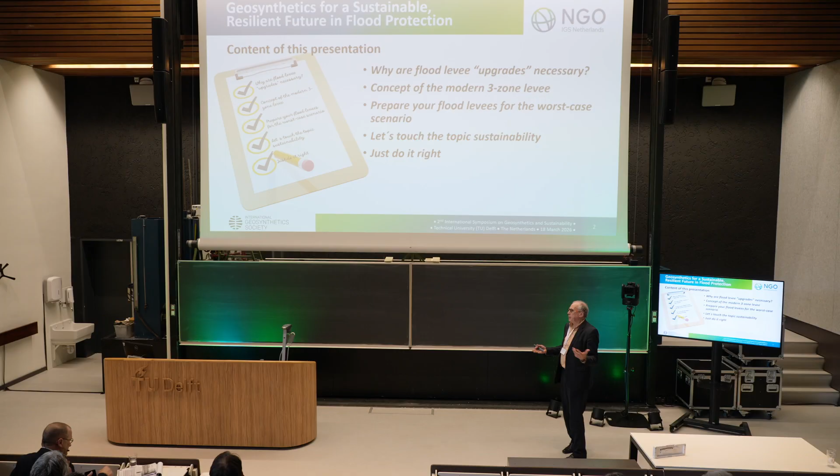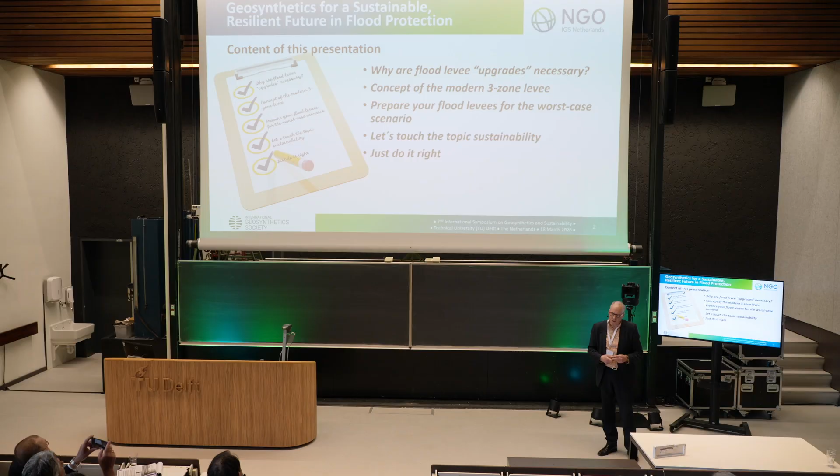So this is a bit of the outline of what I'm going to be talking about today. Why do we need levee upgrades? We all know computers are upgraded, cars are upgraded, everything is upgraded nowadays, even our environmental regulations, so we have to follow that with geosynthetics or with the design as well. Then I'm going to explain a bit about the three-zone concept, which is an improvement for levees.

And then I want to go a step beyond what I said, for young engineers and also the ones who are still designing, to think about what else did I miss. Because water is smart. Water finds the weakness of everything, and we're dealing with water. And then, of course, sustainability. A bit of what you hear from the others is going to be part of mine too, but very short, because I think that's covered pretty good. And then just do it right at the end.

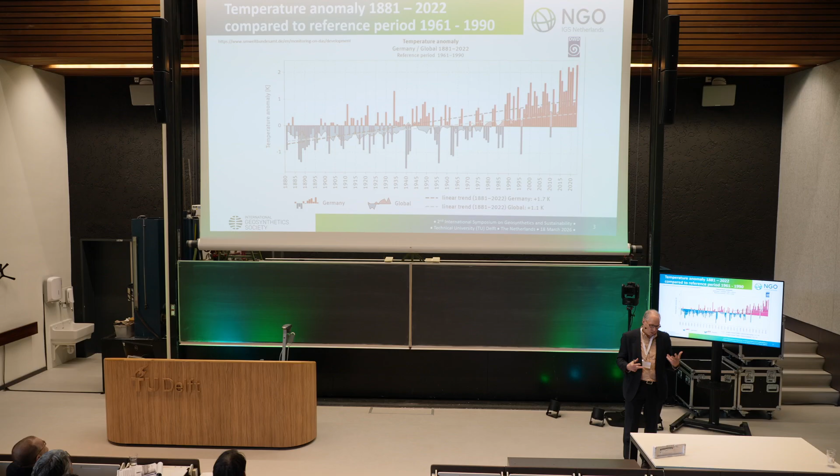Let's start with our climate crisis. We heard a number right now from 1.5 degrees increase and insects dying. In my graphic, you see over here, this is now for Germany, if you look at the temperature period and these right columns over here, you see that the temperature is increasing every year. We know that. That's nothing new. I'm not here to explain why and how that's happening.

And over the last 50 or 100 years, we have around about 1 degree increase. You can take the higher numbers, it will be 1.5 degrees, but that doesn't matter. Do you know the impact of 1 degree centigrade increase, what that really means? I was shocked as I heard that in a presentation several years ago. A 1 degree increase in temperature means for us here in Europe 10% more rain.

Floods, water, rain, that fits together. And if we now go into 1.5 degrees or 2 degrees, it's going to be more water. The problem is we don't know where this water is coming down, it's evaporation, and we hear it every year. We had in Germany 3 years in a row huge dry summers. Okay, great, warm, nice, sun. But then suddenly we had 2 years in a row where the water just flushed down the whole summer, and we had a lot of floods.

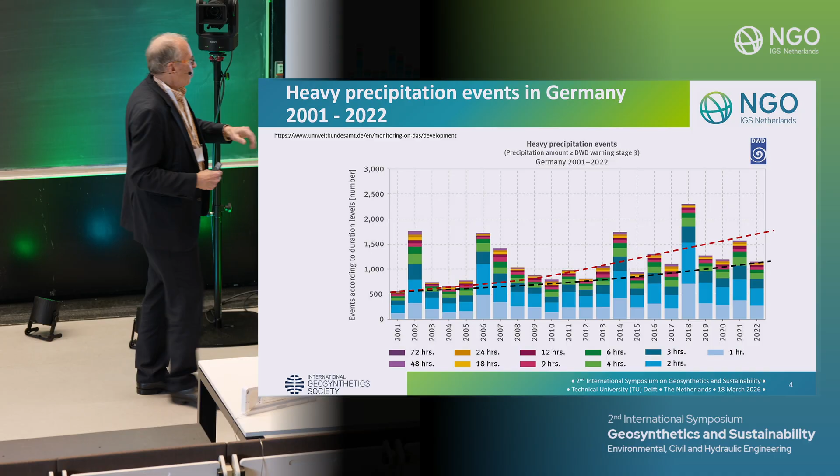Everything we designed 100 years ago didn't include these factors, we didn't know about them. So please, young people, don't blame us, we did everything wrong, we didn't have the data for that. But now we have much more data, and now it's the chance to improve these things.

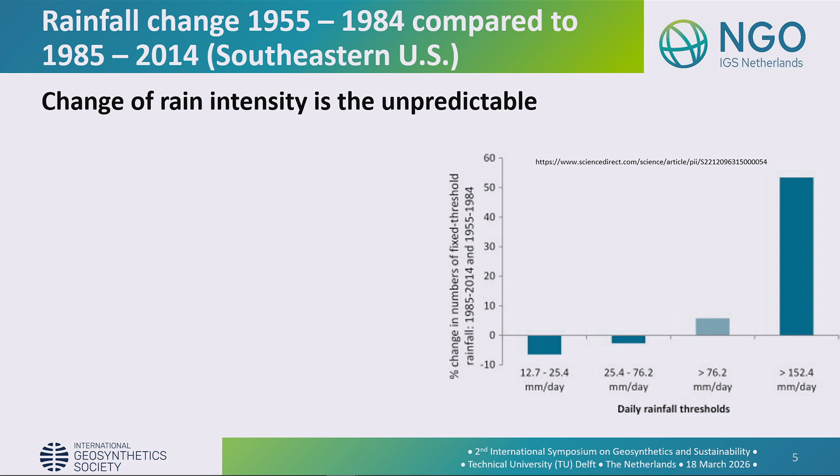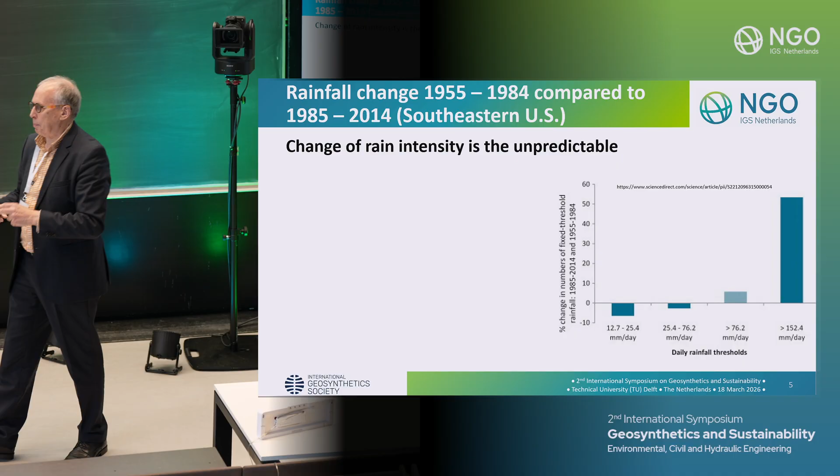And now my question: climate crisis meets an inequality or a structural imbalance, not good design or levees not strong enough. What's the word for that? You were right, it shouldn't happen, but if it happens, what is that? It's easy, it's like the egg of Columbus, if you have the answer it's easy. It's a disaster or it's a tragedy. People die, we lose money, a lot of things happen. That's the consequence, we just have to face that.

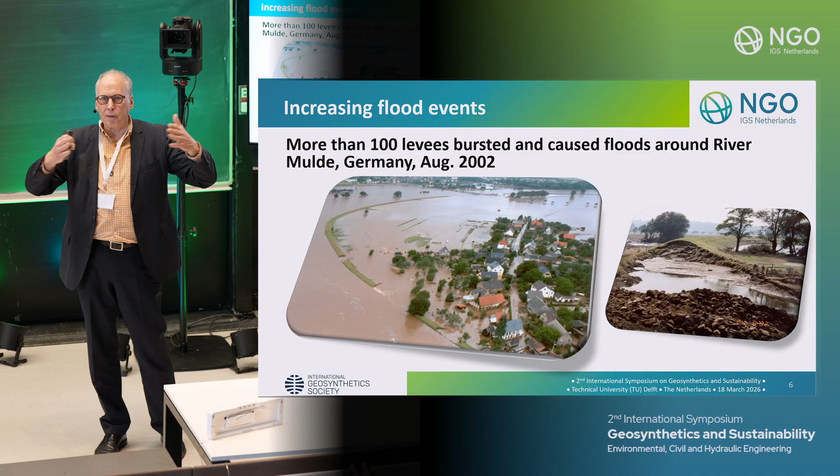And now, as engineers, we have to go a step forward. These are from 2002, look at the levees. Levees were just flooded. They were not bad, they were not wrong, they were well designed, but they couldn't withhold the water for that period of time, because the duration of water coming down and flooding was longer than those levees were designed for. So we have to reconstruct these things.

Many of those levees worldwide, not only in Germany, I think many parts of the world are old. How were they built? With sand, because that was good enough. We knew there'd be a flood, we'd have 2-3 days of water. Water can go through the dam, we don't have barriers in there. They just have to maintain the water and the pressure, and we're fine.

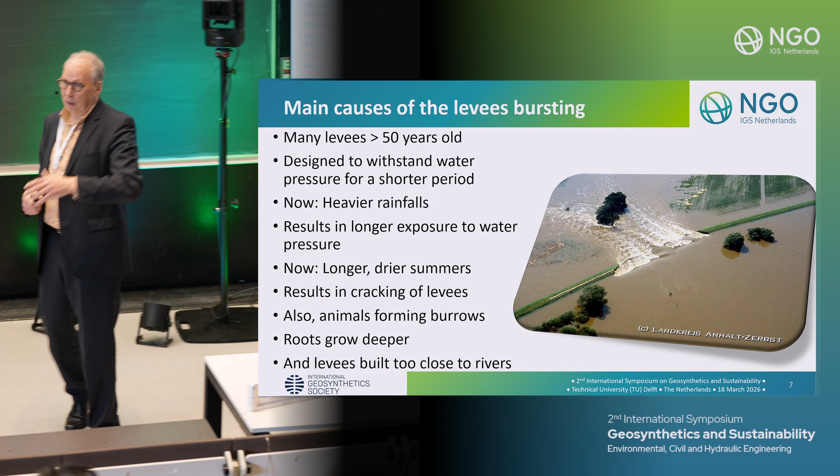So that was it. Now we have heavier rainfalls, we have more water coming down. And worst case scenario is we have rainfall and snowmelt at the same time. We don't know when those things are going to happen. And if we have that - Austria had that, and Czechoslovakia and those countries, they had snowmelt and then suddenly a lot of rain. That's a disaster for everybody.

We also have longer and drier summers. What does that mean? That means the levees crack, roots grow deeper because they are looking for water. Animals bury themselves into those levees, they destroy them, make channels in there, and water is smart - it will find the way and go through there. Once the water goes through a dam, that's where we have the issue.

And the last one, that's our problem. That's economics - the last one is our own problem. We're causing our own problem. We built too close to the levees. And I'll show you some examples.

This example, US, I'm sorry about that, but they followed the Ludy reduction of floodplain areas. They said, oh, we have all this area over here, and we could sell it. Nothing happened the last 5 years. Let's make cheap land out of it. So you remove the levee closer to the river. You sell this, you build housing, and suddenly we have these rainfalls and snowmelt and whatsoever, and we have the floods, and everybody's surprised.

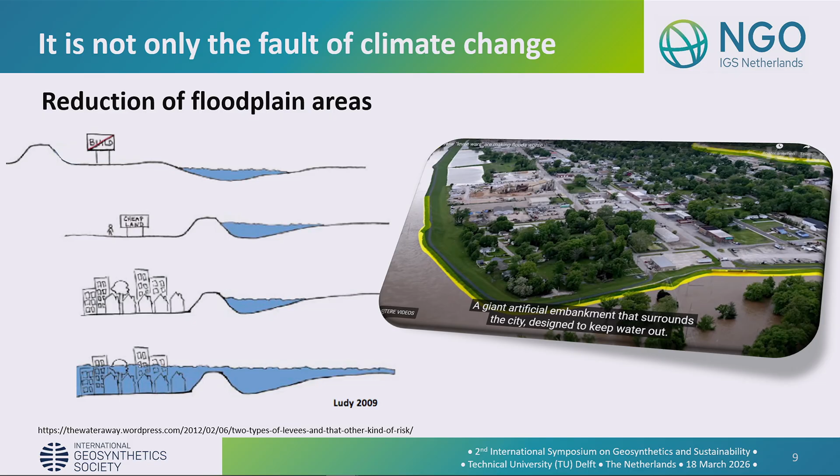This is an example you see over here on the picture - the original levee was back there. And now they built all the way to the front side, industrial area, fine, is great. Nothing happened to them, by the way. They were lucky because they lived upstream. But all this water coming down the river had to go somewhere. Originally, it was able to go into this floodplain area, but it's blocked. So the water just moves on down the river. And now the communities who lived down there, they got flooded.

I can imagine in the US a lot of lawyers making a lot of money off of that, suing those people because it's their fault at their area, but that's another story. So don't do those things. The water has to go somewhere and has to go into the floodplains.

So here we have the damage mechanisms of a levee. The first one, okay, we can't do anything against that one other than to build higher - the overtopping. We'll come to all of those topics and how to build with geosynthetics and prevent those things from happening. Erosion on the upstream side, on the water side, critical because we can't see it. Because if the water's there, you don't see under the water what's happening there. If something like that happens, then your levee could burst and break.

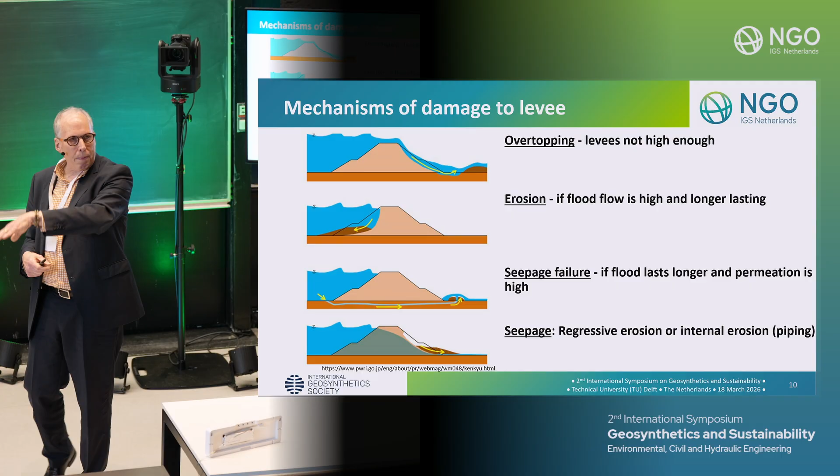Seepage under the levee is also critical. You can see that because water would be on the downstream side, so you see that water if it's not raining. If it's rained the whole time in that area, you won't see it, but if it's dry and you're just having water, you can see those puddles of water. And then, of course, the seepage, which causes erosion on the backside, on the downstream side, which is really the big issue. So these are the things we have to consider in our design and do something against it.

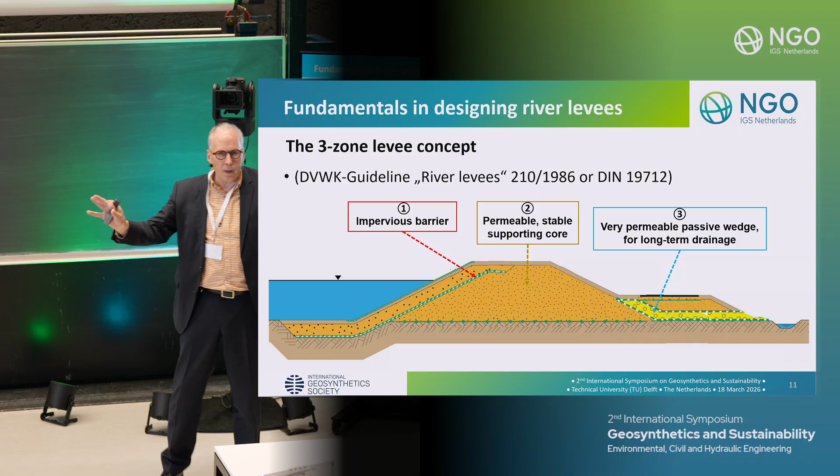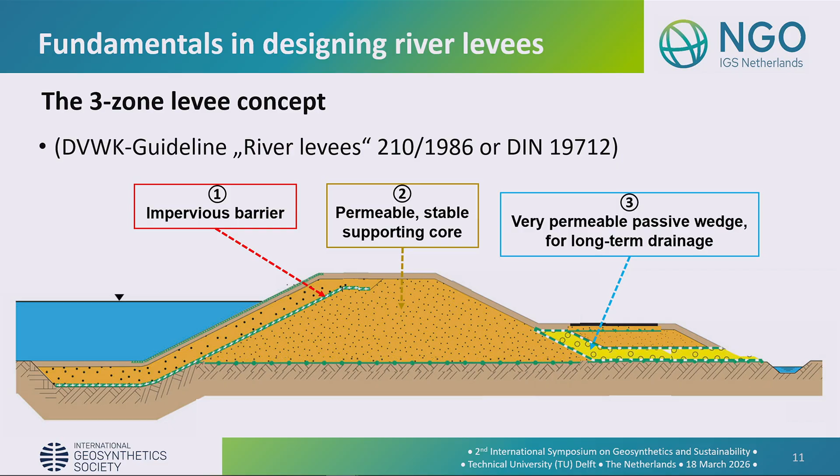Now, the first and the easiest one, which every handbook will tell you, if you build a new dam, put a barrier on the front. Good - if you do that, I'm already happy, or every designer will be happy. You have a barrier on the front side, you're preventing the water flowing through your levee. You can go down on the front side, you can build horizontal there or vertical down here to prevent the underflow under the dam. Then you're already pretty good. But that would be, I would say, the easiest design - that's not the high-level first-class design, which I'm going to.

The second thing we're going to be looking at is the supporting core, and the third one would be our release, sometimes called a permeable passive wedge. It's also called a defense road, so roads and trucks can drive during the damage or during the flood season in that area.

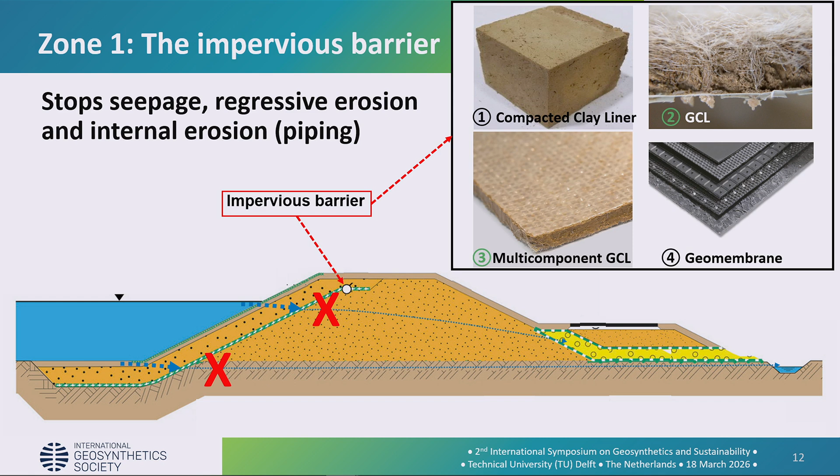So first of all, we have various solutions. Some of them are clay solutions, some can be geosynthetic solutions, and it can also be a geomembrane. Honestly speaking, geomembrane and compacted clay liners are those two solutions I would not 100% recommend, even though a geomembrane is probably the most impermeable material we have. But you have to think in terms of construction as well. You have to weld them together on site.

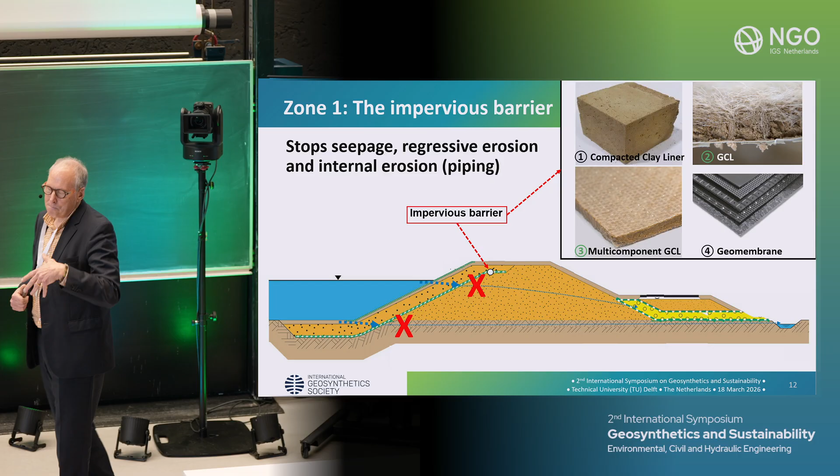They have to be protected against damage. You need geosynthetics or sand for protection. Sometimes you have structures there where you have to weld against, and you can't weld concrete and a geomembrane together, so you have a lot of costs involved. So geomembranes are not the most used ones. The most used ones are basically geosynthetic clay liners, and we'll talk about these different systems shortly.

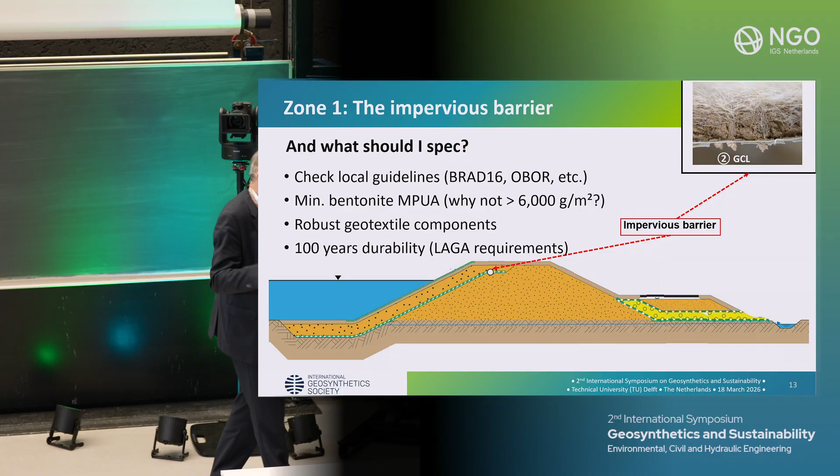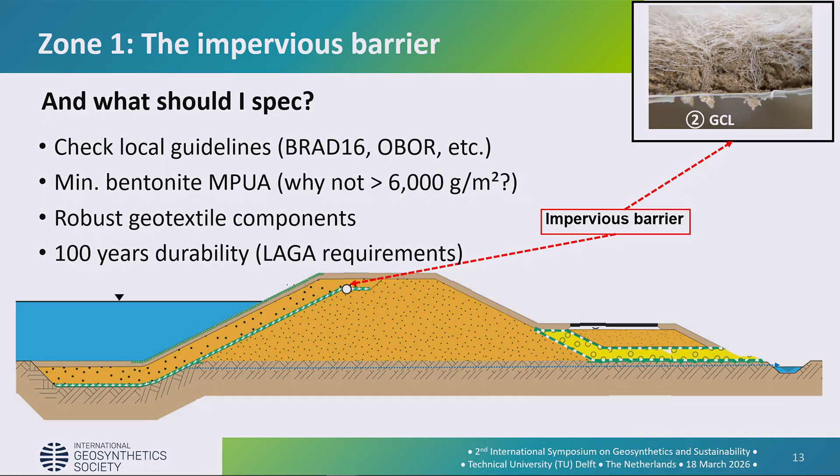Now, I said I'm not going to talk about values, but I'm going to give you some recommendations to think of. I want these young engineers to think a bit more. What do you do? First of all, you have to check if you have local requirements or not. Luckily, in Germany and also in the Netherlands - I'm not sure about the US and other countries - I haven't seen very many. There's not many regulations out there which give you a guide. There are books, and they write about everything, but not too specifically about geosynthetics. So check that number first.

The second thing is, if you use a geosynthetic clay liner, most of them are going to tell you round about 4.9 kilograms, or let's say roughly 5 kilograms of bentonite is something you should have. Fine, that's good, that's a good number, it's a standard number, it's used worldwide. Doesn't matter if it's 4.5 kilograms or 5. I'm not taking that number as the final answer.

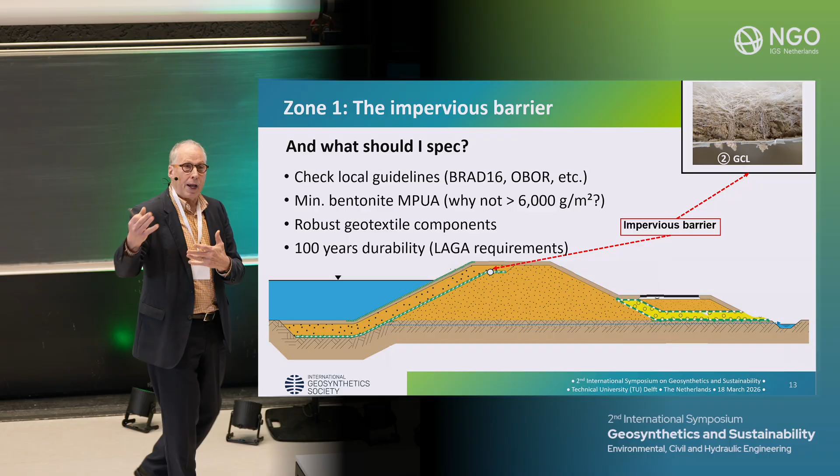But sometimes it's wise to look at what is available on data. What do I have, basically? Is that a good number or not? Or can I go higher? Can I go lower? No, lower, don't go lower. But can I do more and better? And what does that basically mean?

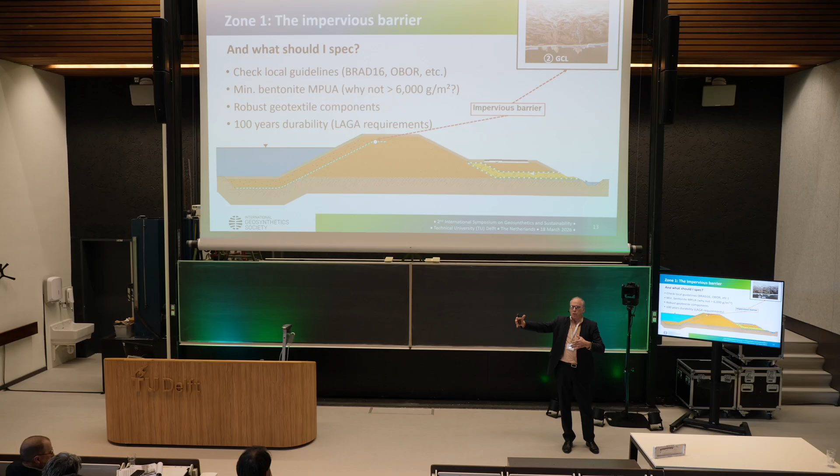So if you take a GCL, for example, with 4 kilograms of bentonite, and you look at long-term values, you have to take a reduction factor, because the bentonite can, for example, undergo ionic exchange and then have higher permeability. So we have a factor, let's say roughly 10, just as a number. But if I increase my mass per unit area to 6 kilograms, as an example, and we know that from landfill design in Germany, suddenly your value, your higher permeability value goes down to a factor of only 5.

And if you theoretically go to 10 kilograms of bentonite, which would be an overkill, an example we've also seen on the market already, suddenly your values may be only a factor of 2 - a safety factor for the future. That means your permeability in the future is not going to be as high as it would be with a GCL with a lower mass per unit area. So you can play with those numbers. You can also play with the geotextile components and durability, but those are things you have to look into on your own. I can't explain that in half an hour.

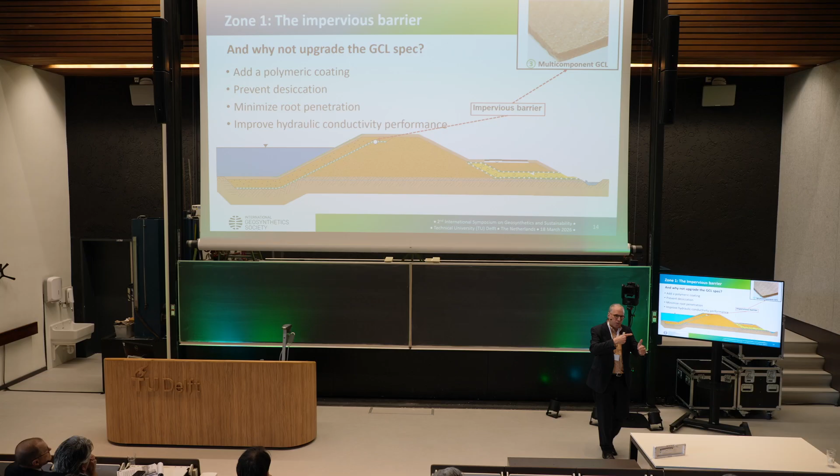Next, I can upgrade my GCL, as an example. I can put a polymer coating on top of it. This is like a composite lining system. We heard that in landfills in the US, they only use composite lining systems or even double liner systems. I mean, a landfill is something else than a levee. On the other side, is it really something different? It doesn't have the same environmental impact, but it can impact properties, life, agriculture, everything living around us. It can have a huge impact. So sometimes it's a good idea to think about how to improve my system.

It can't prevent roots growing through it, but it can minimize them going through. It can prevent desiccation - bentonite, we all know, works with water, and if it dries out, it desiccates. But if there's a polymer coating or a geomembrane on top of it, you won't have that desiccation anymore, and it will perform much, much better. Just as an idea. And of course, the last point, it improves the hydraulic conductivity. I think that's a no-brainer, we got that very easy.

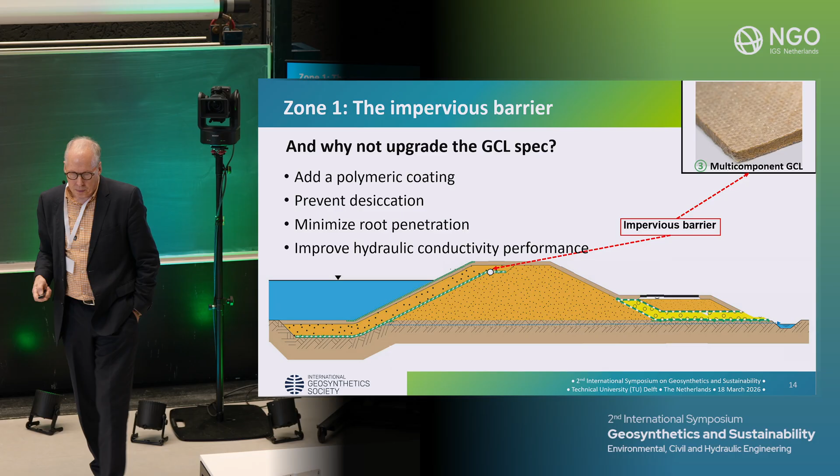Now let's come to the extra points, how a good engineer should think. Now we heard that we had upstream slope failure because of erosion.

There's a handbook chapter with erosion control in there where we have that.

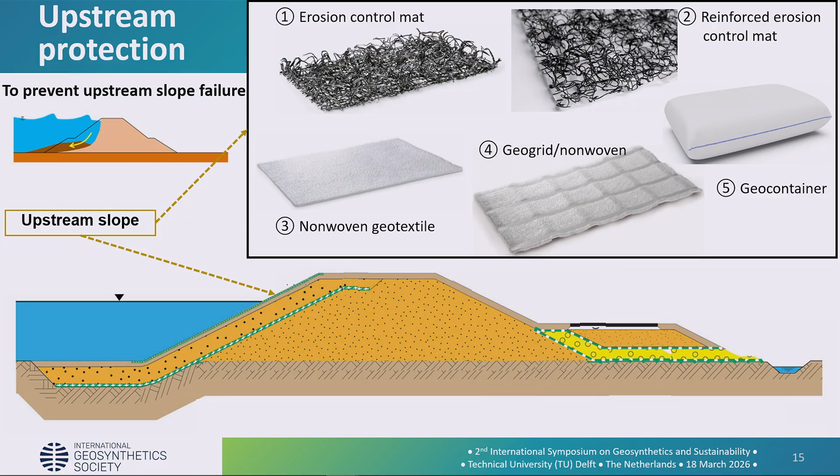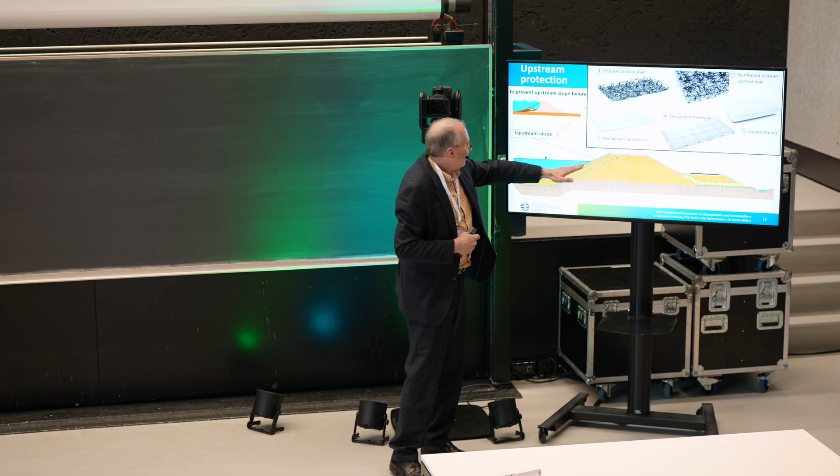So now my point is, where can the water really disturb or hurt my design? I covered the permeability, or the barrier. Now I have to look at the upstream surface. I know water's going to run down there, and fast. There can be trees and bushes in there, and they can take the weeds away. Once those roots and weeds from the grass are gone, it's a susceptible, dangerous situation, because now suddenly erosion can go very fast.

So I can stop that by using geosynthetics, just saying the ones available. It can be an erosion control method, it can be a nonwoven, it can be a composite material of a geogrid with a nonwoven together, and it can even be a geocontainer in that. And that's an example I want to show you, if you really want a high-end design, and you know this could be a problem in future, and I want to avoid this failure.

Young people, think like this. If you build something like this, and after 10 years this thing fails and 100 people die, 10 people is enough, and you hear that, and you say it was my design as a young engineer, you won't feel good. But if you say, hey, everything worked fine because I put geocontainers in here with local sand, it's not expensive. I mean, maybe the construction is expensive, but taking local sand and putting it in containers in front of that, this is going to make my system safe for 50 or 100 years. Wow, I did a good job.

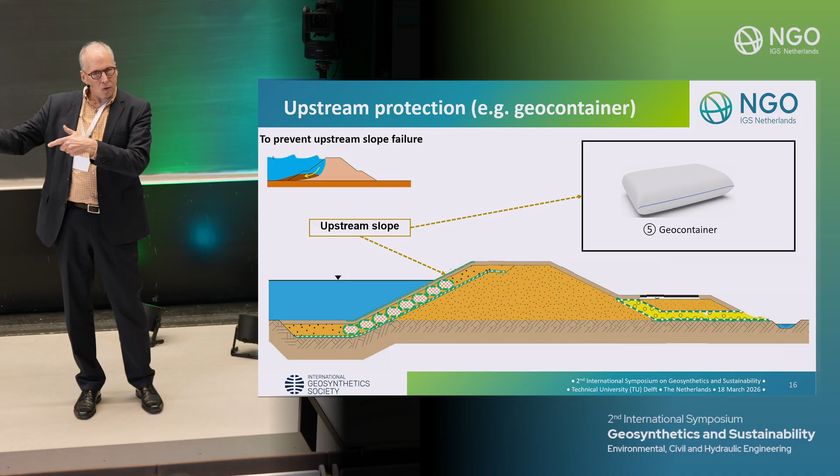You have to convince the people who have to pay for it, of course. But I think you can do that in analyses.

The next thing is geogrid reinforcement on the base. Also, there's a chapter in the book. Why do I need reinforcement down here?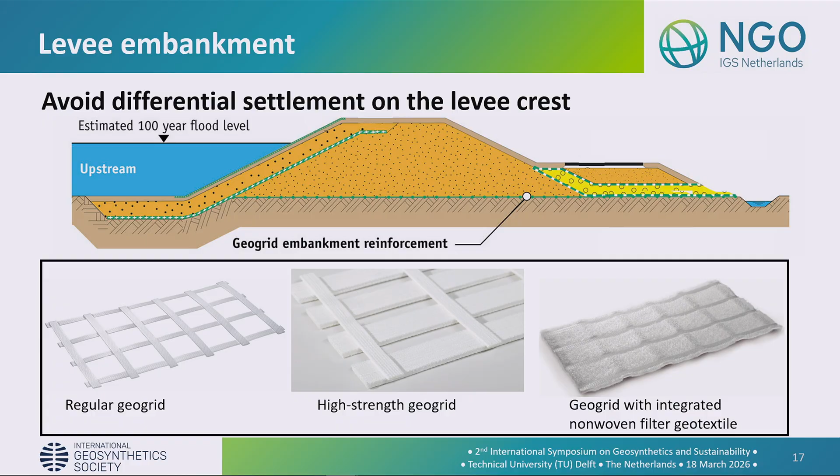Quick question, 3 seconds. Slip circles? Yeah, but what's the main reason for this? Stabilization, stabilization. Okay, you're all on the right track.

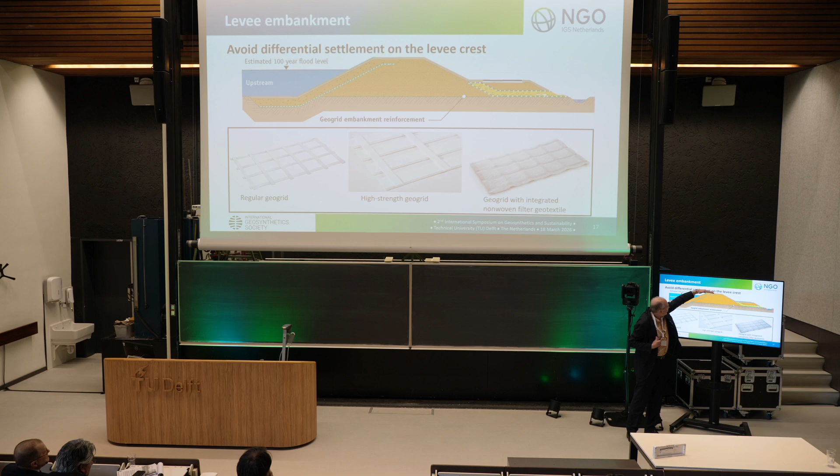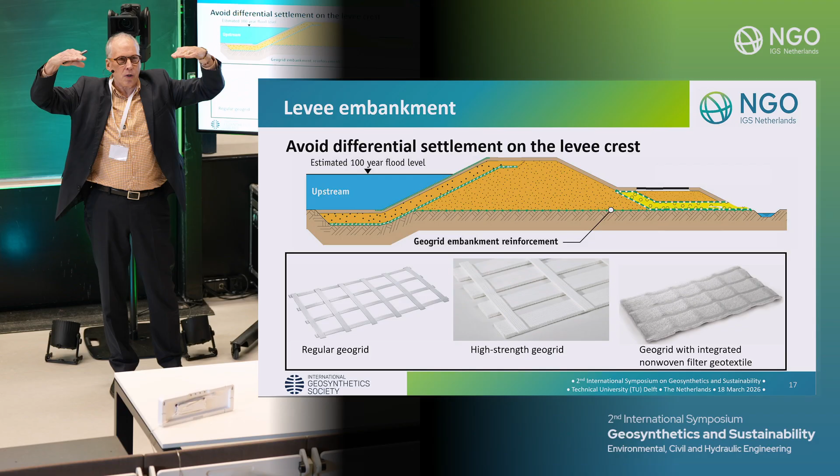I need this over here to prevent this part from going down 0.5 meter. Because if my top level at one point is 0.5 meter lower, and I have a high water level at one time, that's where the water's going to go over it. And if I have overtopping in an area where I have settlement, your dam is damaged. You cannot stop it. Water running over a dam, no way to stop that.

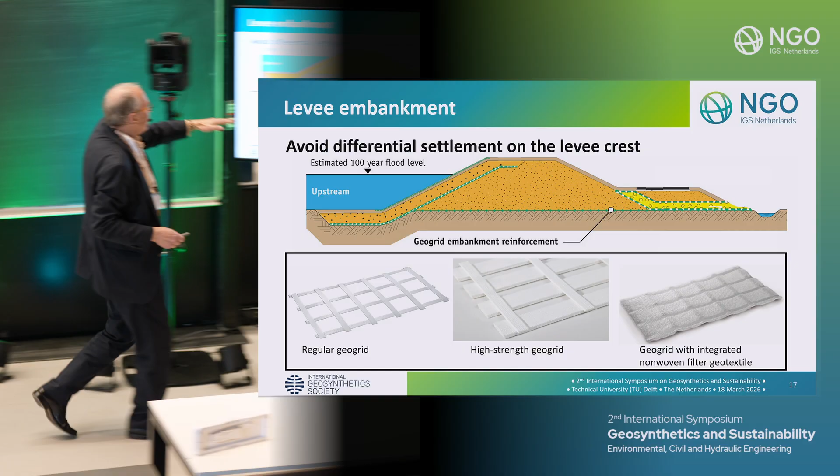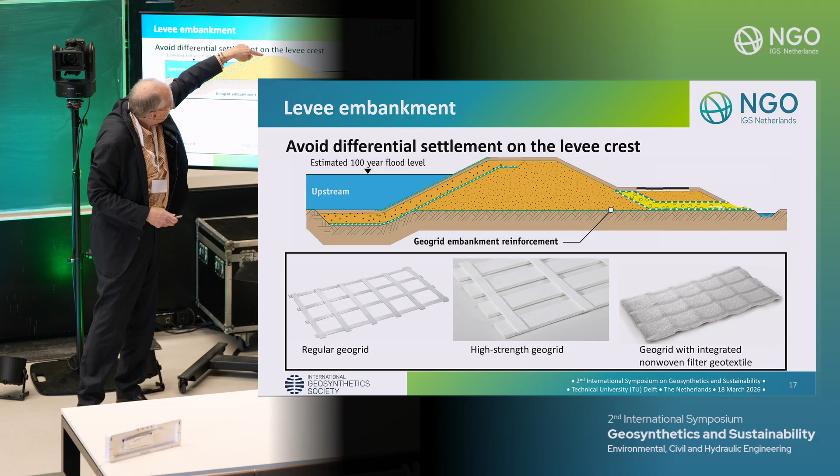So this is a good idea. Yeah, you're correct, I want to prevent settlement. I want to have a stable ground. We're putting weight on weak soil. Yes, that's as well. But also the main thing is, up here, I don't want my top, my crest, to settle just 5 centimeters down.

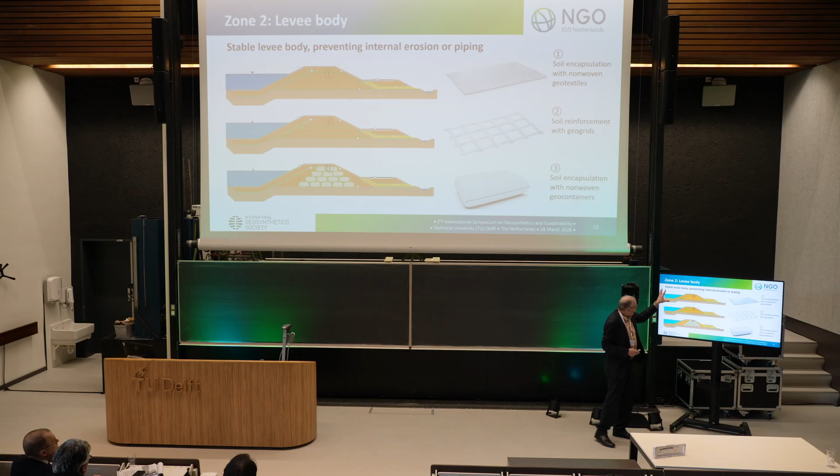The next thing is I want to have a very stable core. I want to prevent, in case anything happens, in case water flows through, in case my barrier didn't work, or if you don't build with a barrier, this would be the ideal solution: make this in here stable so that your core material does not get washed away. How you do that? That's for designers, that's not my issue. You can use geogrids, geotextiles.

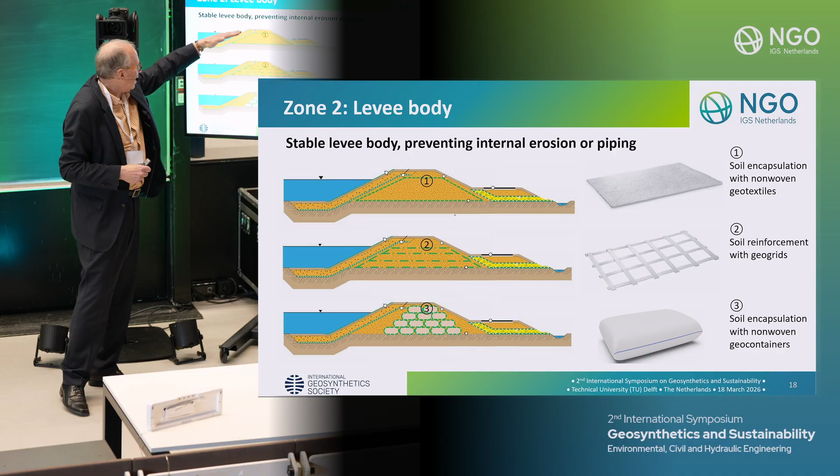You can do a reinforcement like a slope reinforcement. You can put containers in again. I don't care about that. But if you thought about that and said, yes, I want to have that, or I don't want to have that, at least that's the right way to go.

Now we come to our huge problem, because we don't know on this side how high it's going to be. Well, of course, if I know from history it's going to be at a certain level, I can say I'll build my dam 2 meters higher. Okay, why not? A lot of money, however. But typically we go just like 1 meter higher than the highest water level we expect.

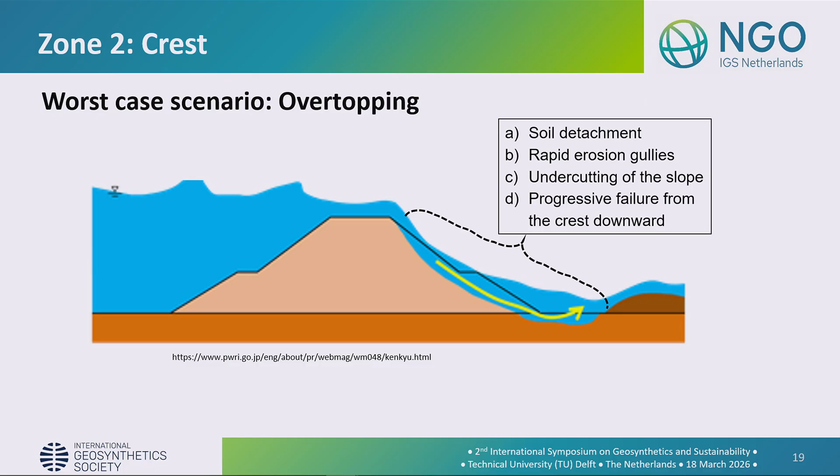But you can also do something in this occasion, because if this occurs here, there's no chance you can save that levee anymore.

You can try to put sandbags in there, forget it, the water's running down, no way to prevent that. But what you can do is reinforce this area on the top side with a geogrid, of course.

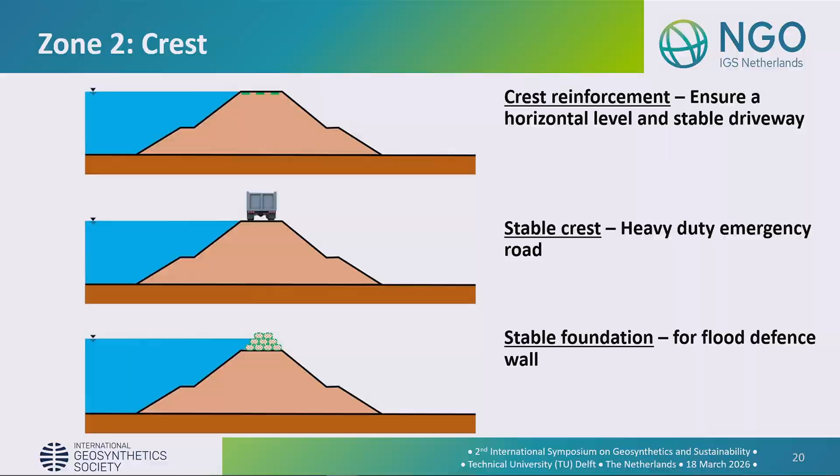You need a stable foundation. With a stable foundation, when it gets critical, trucks can drive over that. Because if you don't have that and it's wet and trucks drive over it, you get rutting, they can't move forward fast. And then you can put containers on top of that and put your security on top of that, and at least prevent this overtopping and save that dam. Because if it's gone, it's going to be very, very expensive to repair it.

Now we come to the passive wedge. In my opinion, the passive wedge is really a cool design. Because what does it do? As the word says, it's not really passive wedge number one, it's passive wedge number two.

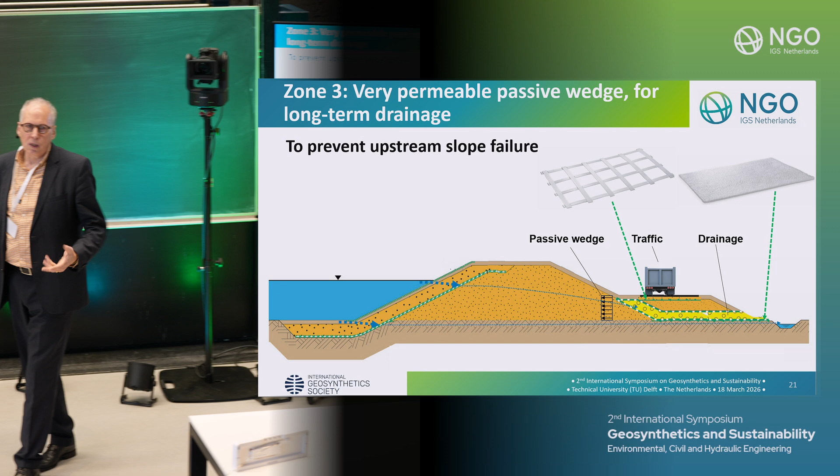Number one is basically the water collection on the backside. So in case I have an issue that water is seeping through my dam or underneath it, I don't want that to happen, because we all know geotechnically what happens if my structure gets wet - it's just going to move and flow away. But if I have a passive wedge on the backside with a drainage collection system using geosynthetics and gravel material on top of it, and I can take the water pressure away, then I at least have another safety factor in there in case this doesn't work.

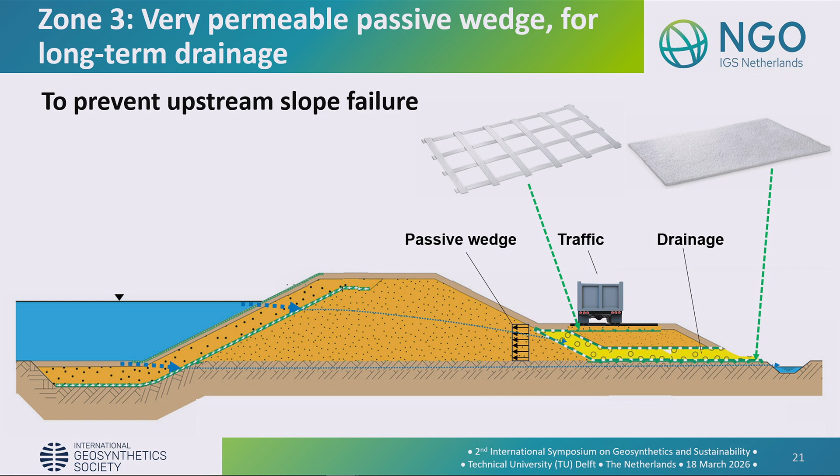Additionally, I have my vehicles, which in an emergency case can drive back and forth, bring sand loads, sandbags, whatever, and reinforce the material or bring this material up. And to prevent an overtopping, there's a lot to it.

And in the summertime, the bicyclists and people who walk around can walk on the dam and look at the nice area, which is also an attractive event as well for those people.

So here's just the BRAD 16 guideline, or OBOR. I won't go too much into details about that. Very good documents, both of them. They're basically pretty similar with a few changes in there.

They basically describe exactly what I just said, like the German BRAD 16 additionally has beaver protection - geosynthetics or meshes up there, because beavers are the ones who really can dig into it, so they have protection in there. They have their passive wedge over there.

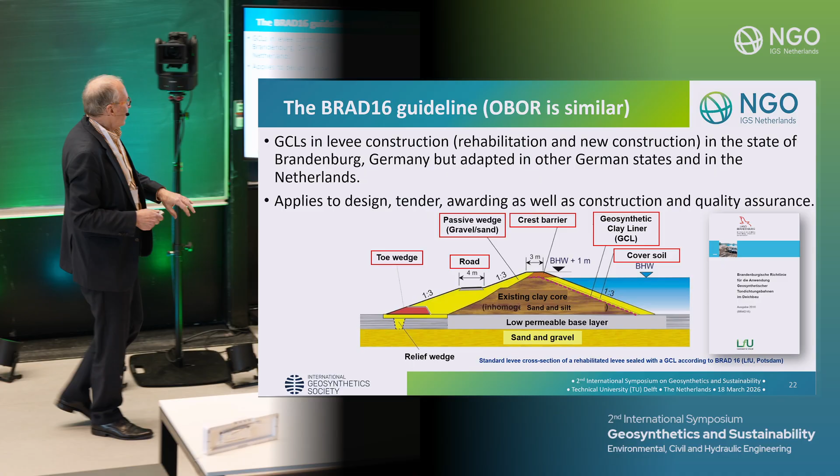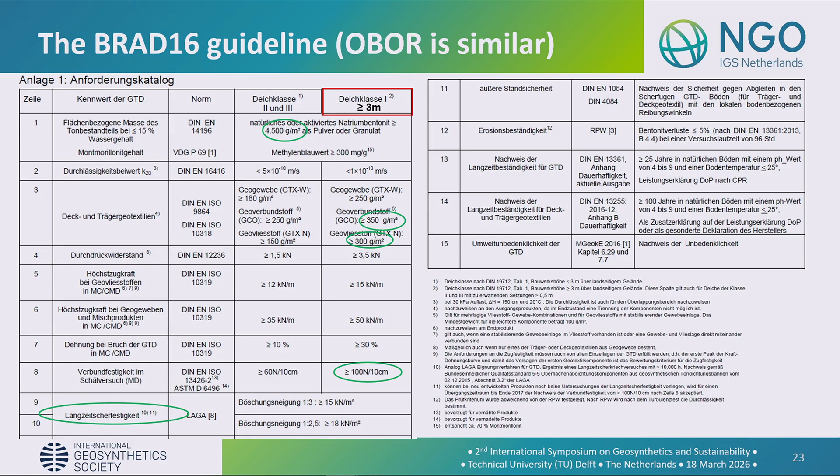They have their dike defense road in there. They write about the core. I'm not going to go into details into that, just showing you that there are values in there, that they talk about the long term. They talk about minimum mass per unit area, about sufficient geosynthetic materials in there, and so on. I'm not going to go into that because I think you can all read about that.

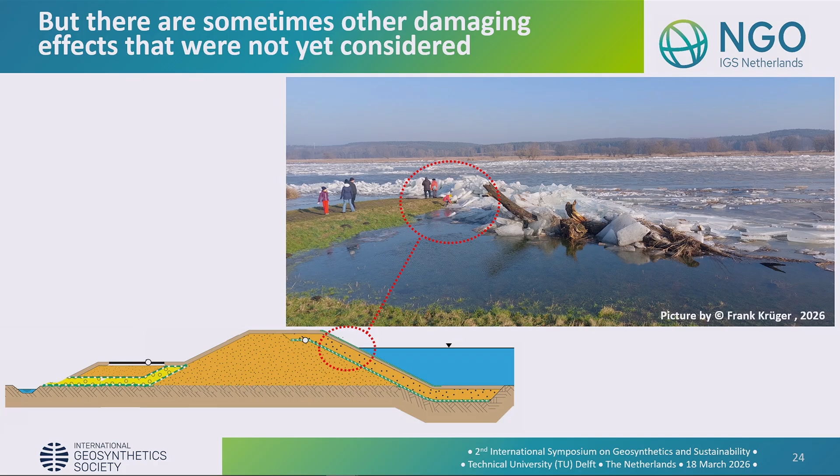Here's something we forgot over the last decades. You can see the number, 2026. This was this year in Germany. Did we ever - I didn't think about that the last 10, 20 years, because it never happened.

This January in Germany was, since 25 years, the coldest winter we had. Climate crisis - yeah, of course that belongs to it. And this is what happened.

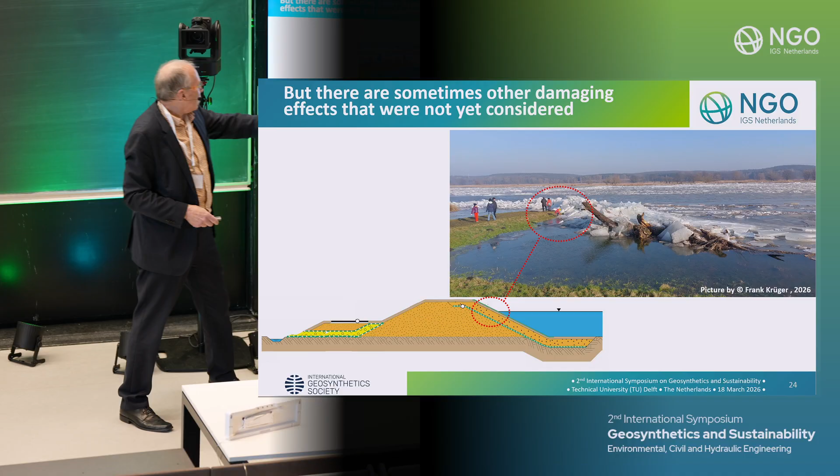Now this ice moves down with high pressure. It hits your dam or your levee. Does it have an impact, yes or no? I don't know. So they have to investigate everything now and see whether there was an impact against your barrier system or against the structural design of your landfill.

Okay, let's come to sustainability a bit. This is just an example, one of many examples I could show, but this is basically showing you the installation of compacted clay - so I'm looking at a barrier system of compacted clay.

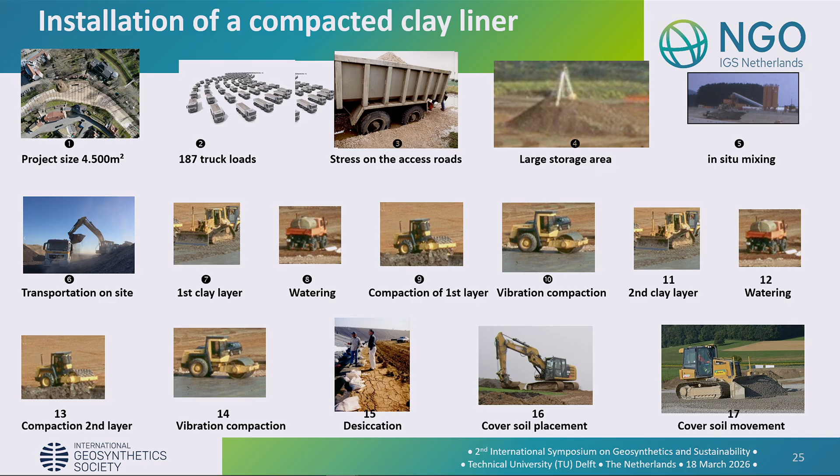I'm tired of always explaining this because it's a no-brainer. You have a project, and then you have truckloads. Here, the project size is 4,500 square meters. I took it because it's one container of a GCL. You need 187 trucks to transport the clay on site. Then you have to install them.

I'm not even talking about the stress on the access roads - they have to be reinforced as well, they get damaged, the regular roads. You have to store it on site. You have to mix it on site. You have to add water on site.

You put in the first layer, 25 centimeters, you compact it, you water it, you put the second layer on top of it, you compact it, you use a vibrating compactor at the end of it, and then you put your cover soil on top of it. And luckily, if it's not hot enough that it didn't dry out and it's in good shape, you install it.

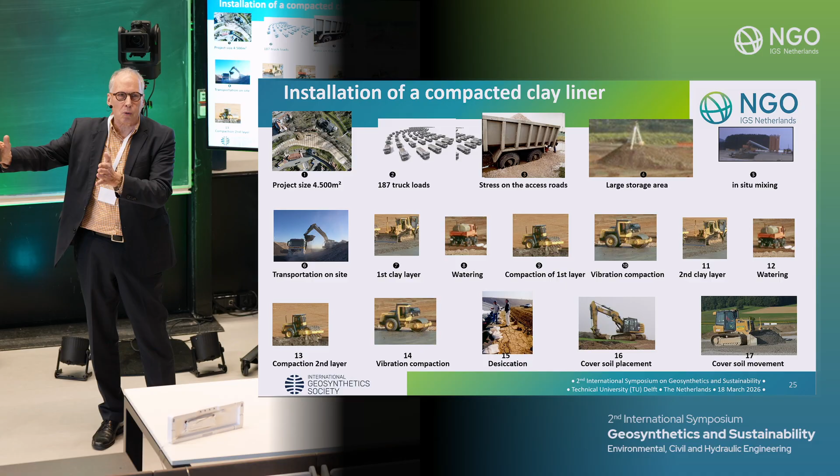There's a lot of equipment out there, with a lot of CO2 and energy demand and costs involved. I know contractors hate me on this, because they have all that equipment and they want to use it. But we're looking to the future. We don't have to care about a contractor having his equipment. If it's not suitable with our goals, then we use something else.

The GCL is a bit easier to install. You can make mistakes, it's a thin element, and I'm a fighter for quality control on site. You have one truckload coming to the site. All you have to do is deliver it, unroll it, and overlap it. Yes, you can make mistakes on the overlap, and if you don't do that properly, that's an issue, absolutely. But we're just talking about the installation process now, nothing else.

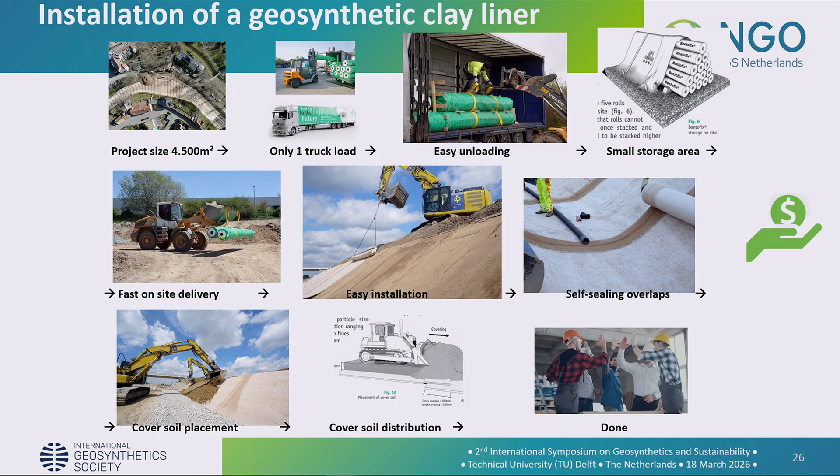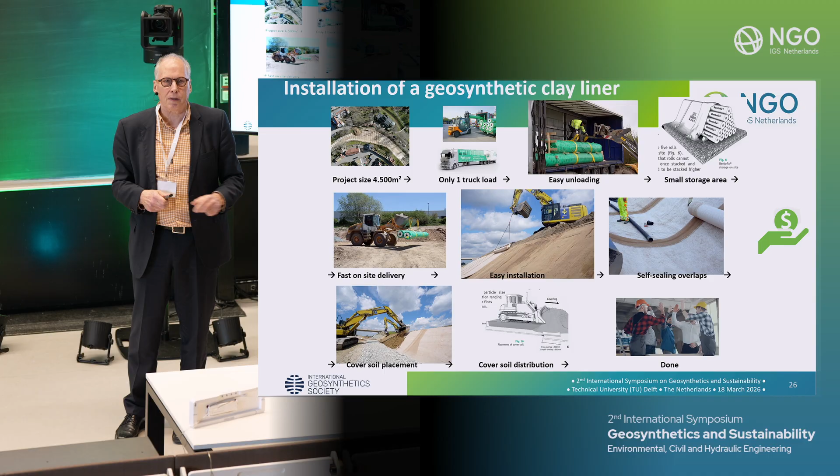Then you put cover soil on top of it. Yes, it can get damaged, you have to be careful. Don't tell the contractor it doesn't matter, you can drive over it—he'll drive over it the whole time. You do have to be on site and look at it. So installation is also important to check on site, because the moment you turn around and walk away, he's going to do everything differently, the easiest way for him. And then those things work pretty good.

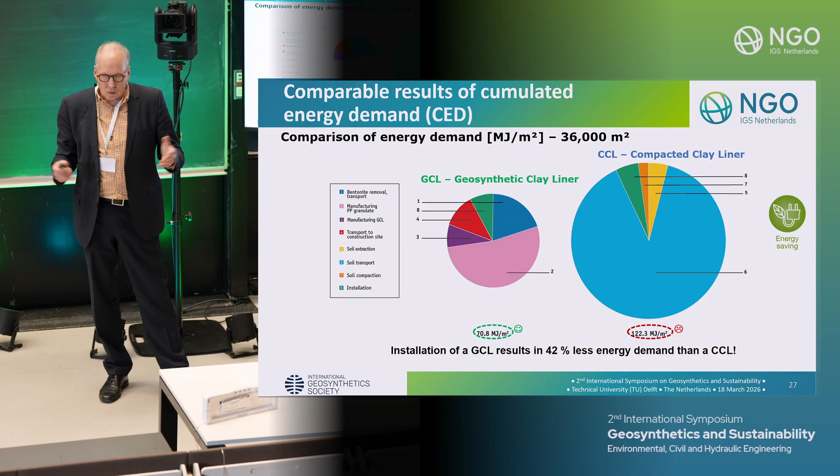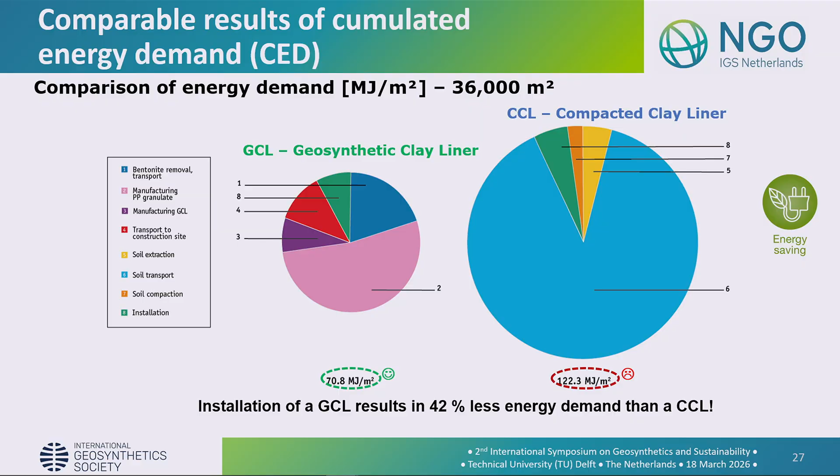Just a short summary—I'm not going into details because you'll hear another presentation from Henning on that. This is just 42% less energy demand for a GCL versus a compacted clay liner. 42% less. What you see here is about 15 years old, and you all know what energy prices are right now. That's another crisis, nearly like a climate crisis. But again, the numbers might be different for different projects.

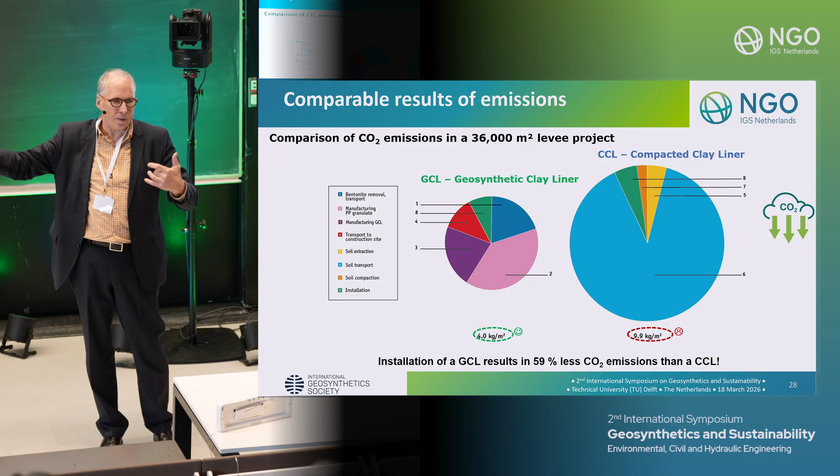Same thing with CO2—60% less CO2 using a GCL for this particular project. You can't take this number for granted for every project, they're all different. As we heard from Mr. Gruber, it's about distance. If the geosynthetic has to be transported 800 kilometers, it's different than if the clay only has to be installed 10 kilometers. Those things have to go into it.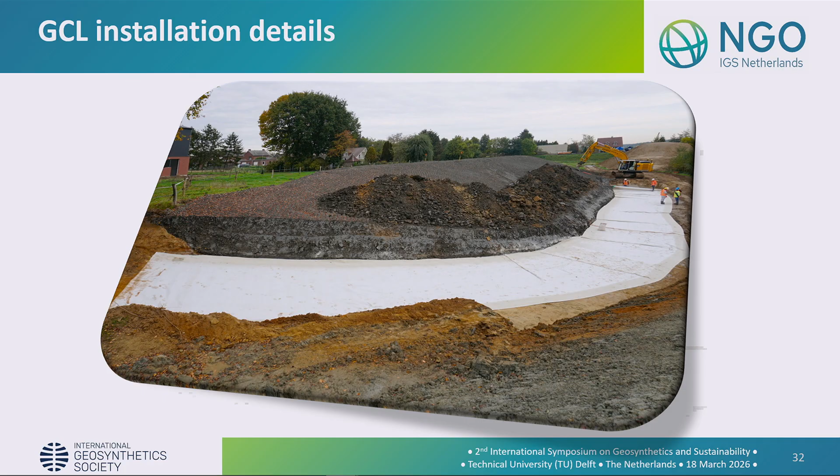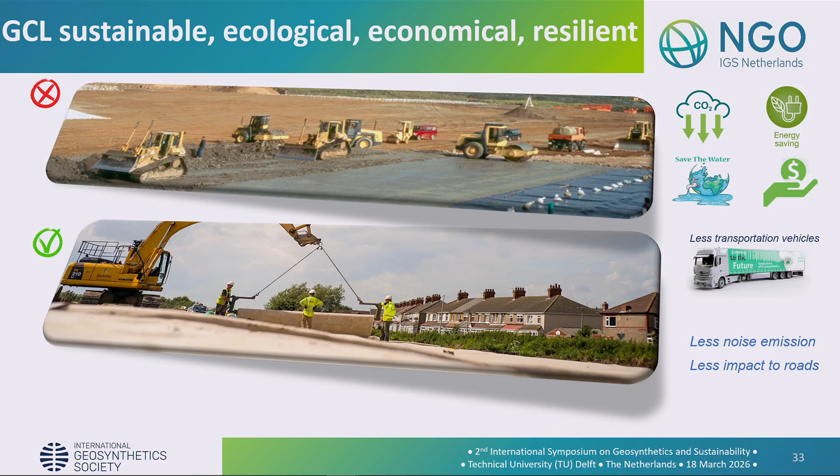Here's a brief summary of a few things. I spoke about CO2 and energy savings. Saving water—I didn't really touch that topic, but if you take compacted clay, you have to add water, and water is a resource we don't have much of. Saving costs is clear, with less transportation meaning less damage. But an important part, also one of the UN goals, is less noise emission. If 187 trucks drive through your town instead of just one, that has less impact on the roads—drive through Germany, or I heard even in the US, the roads aren't in the best condition anymore, bridges aren't in the best condition anymore. We have to reduce that as well.

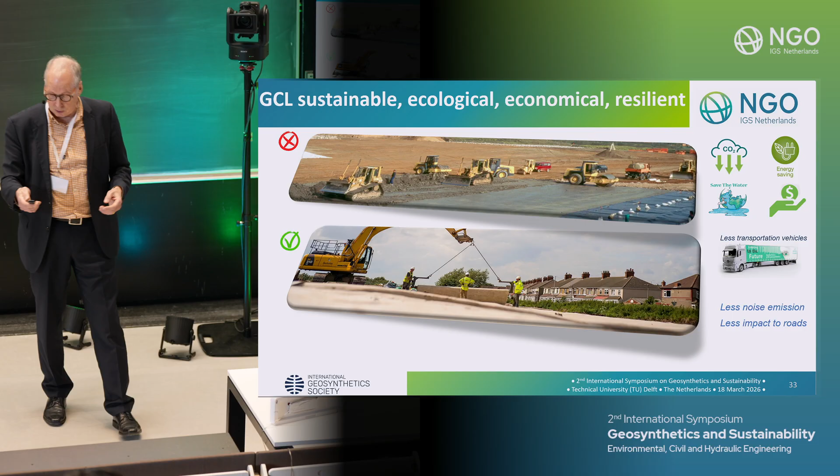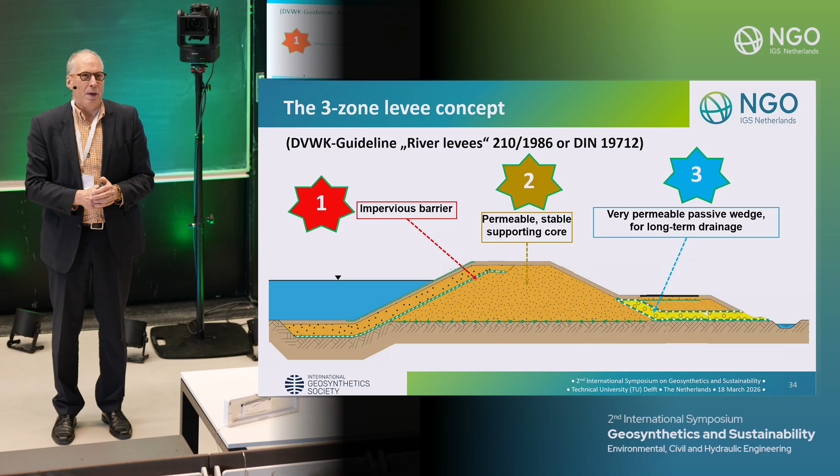Okay, well, that's maybe a bit too easy now. Okay, well, that's it. Thank you very much for listening to my talk on Sustainable Resilient Future in Flood Protection.